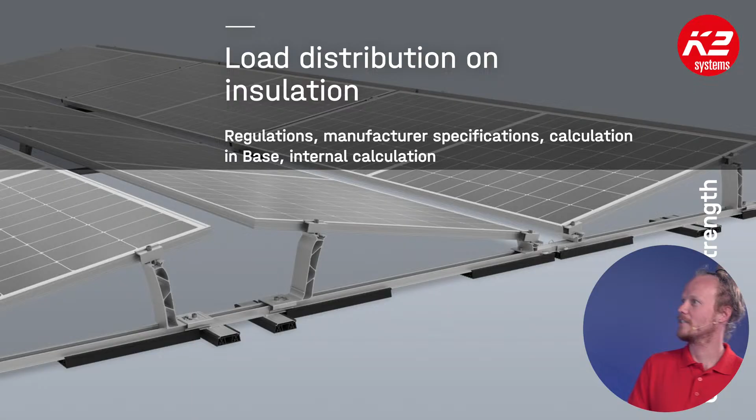In general, the LoadSolver is a product that we have to look at the issue of insulation on insulated roofs, the thickness and the strength of insulation on different roofs. Because when you're going to add something to an insulated roof, you are putting a weight on it that might not be expected to be there as per the insulation manufacturer. And how is that going to interact with the roof? Maybe it's unknown, maybe it is known, maybe it can be predicted. And the shape and size of this extra weight on the roof plays a role.

So the topics of today will be a little bit about some of the regulations which are defining that size and weight and force that you can put on the roof. We'll also go through a little example that we have, taken from some roofing manufacturers that we've been in discussions with. We'll also go through a little base project and talk about the product in a little bit more detail.

We gave a presentation in German earlier this morning, which was very focused on the German market. But while researching for this webinar, we've found that really the regulations are quite different in every country. So it's a little bit difficult for us to give very precise region-specific information. So our first key point, and this is a very important one for today, is that each different country has slightly different regulations and topics that relate to this specific problem or topic.

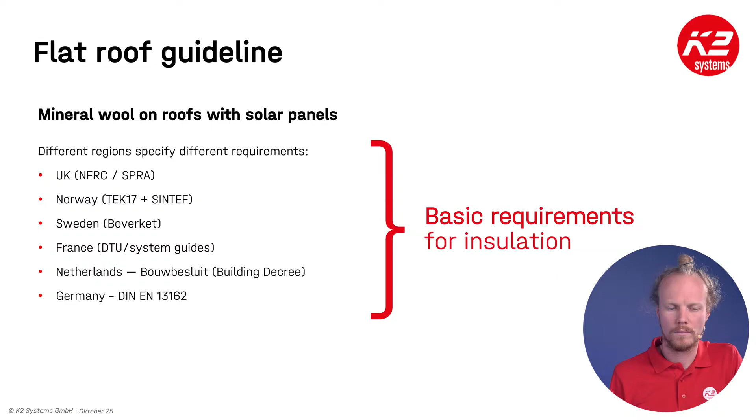In the different countries, you can see them here. These are usually to do with building codes, and specifically for some of them insulated products, whether it be walls or roofs. There are a few examples that we have here in the UK and some of the Nordic countries, and a bit around Europe as well. So we're going to present a specific calculation that's relevant to the German regulations today. It may be relevant to some of the presentation or regulations you have in the country that you're from, but please be aware, revert to these standards when you're looking into this topic for yourself.

As a general overview, almost all roofing insulation companies have a factor that the roofing material has to be tested to and has to meet, generally speaking, to be placed on a roof. This is the CS10, the compression of 10% with 70 kilopascals. This is more so designed as a standard minimum requirement for a roofing building, rather than saying if you put on a very concentrated load of 70 kilopascals, it will only compress 10%. That's not what it's doing. It's more of a general overview saying it's met this requirement, tick, it's then suitable for the roof.

Doesn't necessarily mean it's going to be suitable to put PV on that roof as well. Another one that is often used, and we'll go into a little bit later with one of the manufacturers we've spoken about, is the 2% compression. This is for permanent or semi-permanent loads that are applied to the roof. This is something more suitable for PV, but again, it is dependent a bit on different roofing manufacturers and also different regions. So we'll be focusing a little more on this 2% value, but please refer to the local

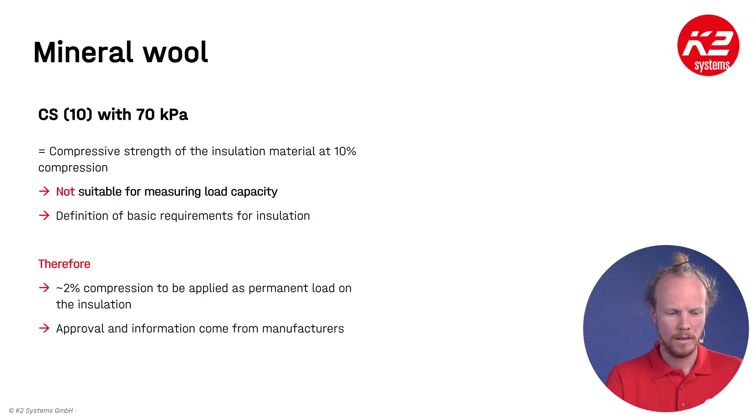standards and the roofing manufacturer. So that's kind of the next point. We did a presentation earlier this morning in German with Knauf, which is a German manufacturer. Well, I believe they're German based, but they have branches all over the place. For example, they have one in the UK and Ireland. And this is the information that they have on their website that we presented, or we didn't present this morning, but you'll see on the next slide we did for the German one.

This is what they're specifying in Ireland. So for the different sized feet that you might have on a roof, or a pressure point that you might have on the roof, they have different allowable stresses or pressures. For a 200 by 200 millimeter square foot, you can have up to 12 kPa. But it does also say halfway through this paragraph that these are references only, and to be in contact with their technical service team. They are the ones, Knauf in this specific case, who can give you an exact

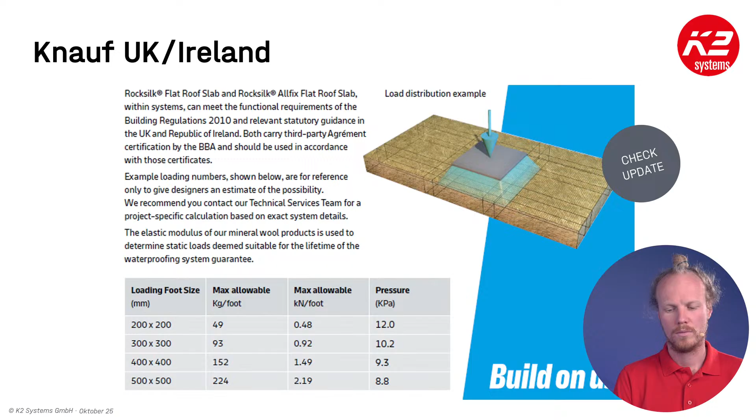value when you say, I would like to place this on the roof, it has a size of this, and then they can provide you with this maximum kilopascal force. Knauf in different countries, and this is what you also might see, in Germany, for example, have a bit of a different system, and it's a little bit more in depth, I would say, where they've actually gone through already and calculated for a number of different sizes. You see here the meter by meter, half a meter by half a meter, all the way down, that for all of their different products, they have different pressure values.

So these values here, I'm just highlighting these because we'll talk about it in a moment, kilopascals. For what we're talking about today, our products have roughly a surface area of 0.03 square meters, which is roughly this size. So we can use a maximum of 35 kilopascals. We've already been in conversation with Knauf about this.

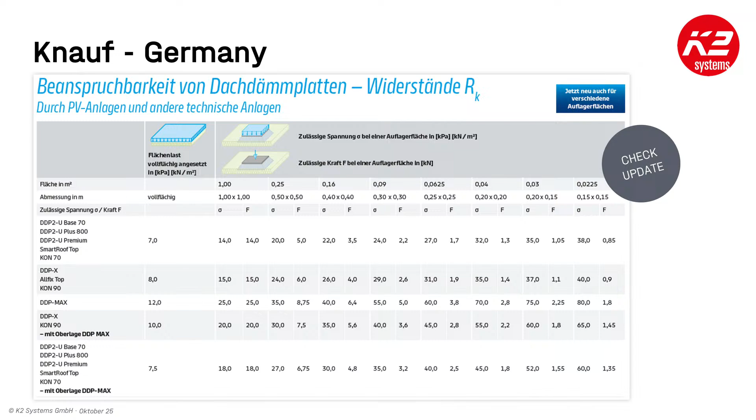The different manufacturers you see here have different regulations for not only their roofing types, also the surface area of the pressure point, but they also have different calculations or different references in different countries. So the roofing manufacturers are also aware of this, that the different regulations are there, and so they handle it a little bit different as well. Any future projects that you might have will probably be a three-way conversation between the roofing manufacturer, yourselves, and us, hopefully to find the best solution that we can.

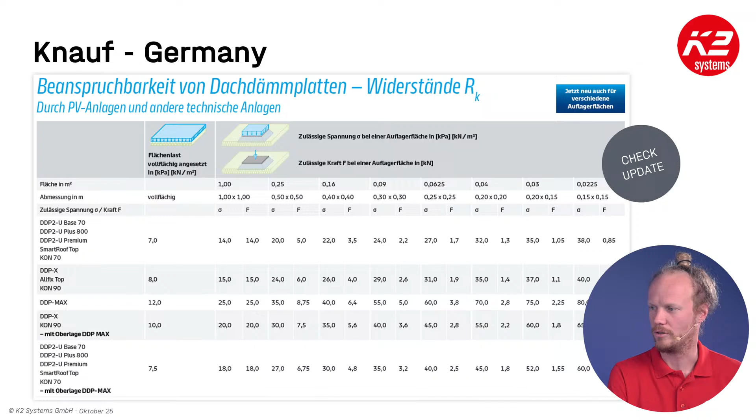But again, in different regions and different areas, you might have different requirements and different points of reference to the maximum pressure that you are allowed to have on the roof. This is effectively what the load solver is here to work with, which is how do we achieve these values here with the products that we have in our system.

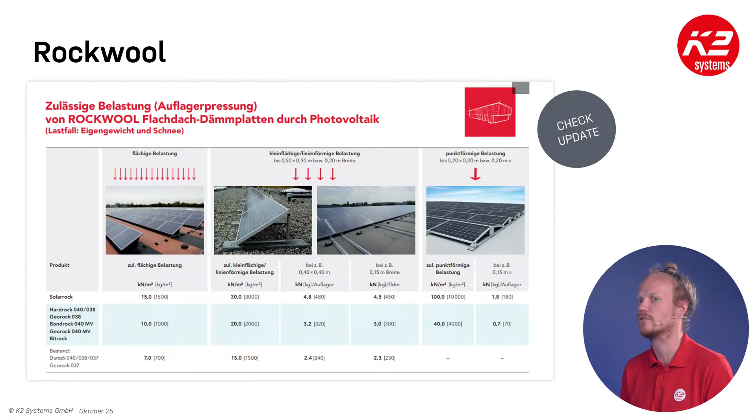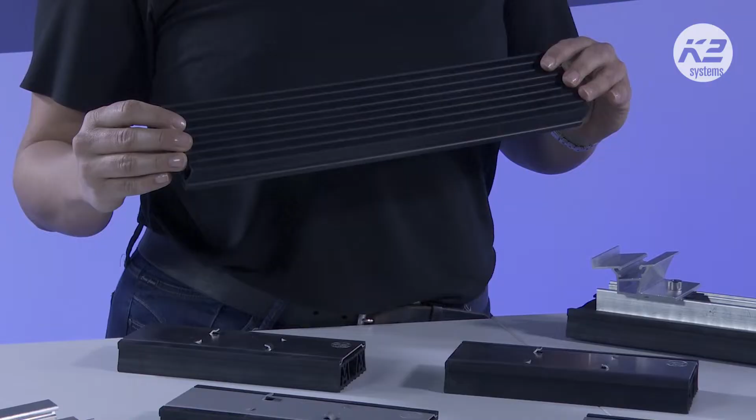Hello again. Maybe we start by showing you what we currently have in our portfolio. Most of you probably know our Mat S. You can see it here installed below our rail. Mat S has a size of 380 by 75 millimeters, so if we multiply this, it's around 0.03 square meters. Not exactly, but quite close.

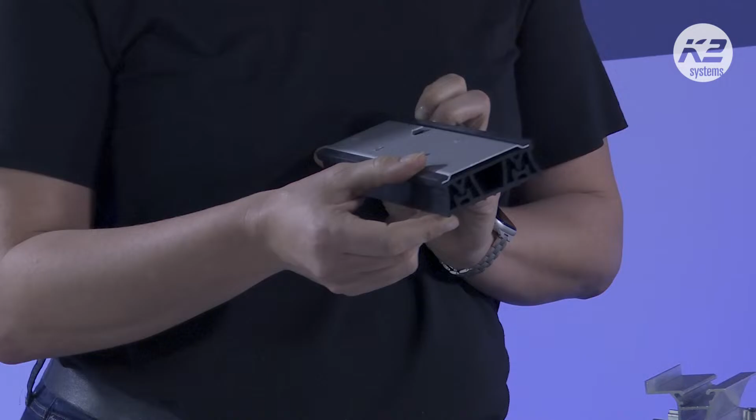And here again we have our Load Solver. This is basically also our Mat S, as you know from the profile, but it's smaller - only 200 millimeters in length, while the width stays the same. What's the difference? If you take our Mat S and put it below our rail, it will look like this, laying under the basic rail. Instead, if we go with our Load Solver, the installation will be done like this - we just put it in here, you hear that sound, and then it's installed. So these are the two products we're going into more detail on now.

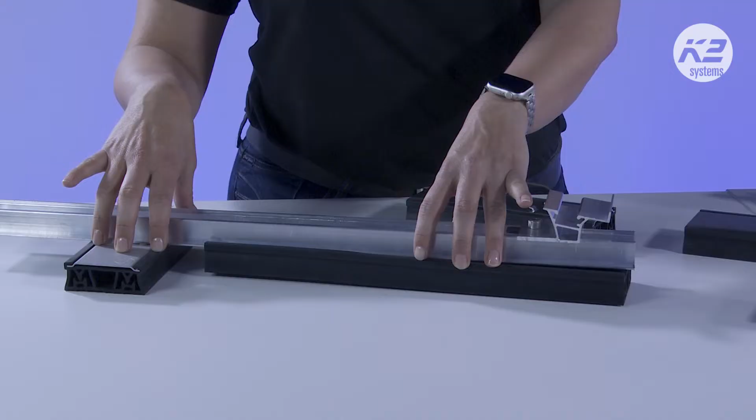It's important for you to know the sizes of these two components, so if you go back into the overview Ciaran just shared, you know what exact number to choose. The second piece of information you need for the right value is what insulation has actually been installed on the roof. This has a certain value, and you have to compare it with the roof surface of the Mat S and the Load Solver, or a combination of both. So let me go over there, I have a slide I want to share with you.

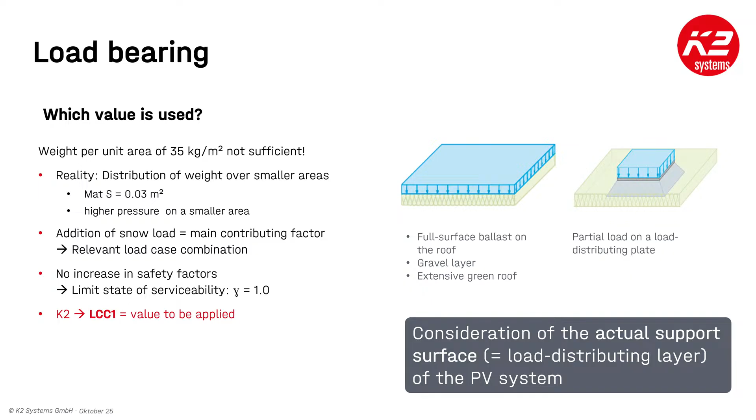So these 35 kilopascal is the value we need to take into account when we jump into our base and check if these two values are a good combination, or if there's maybe an overload, as you can see in this example we've prepared.

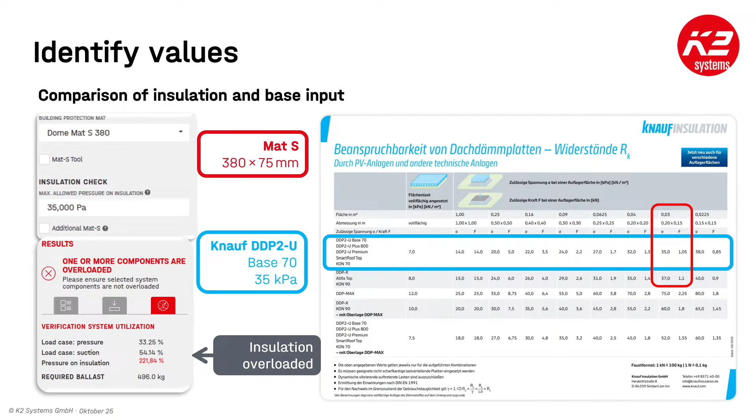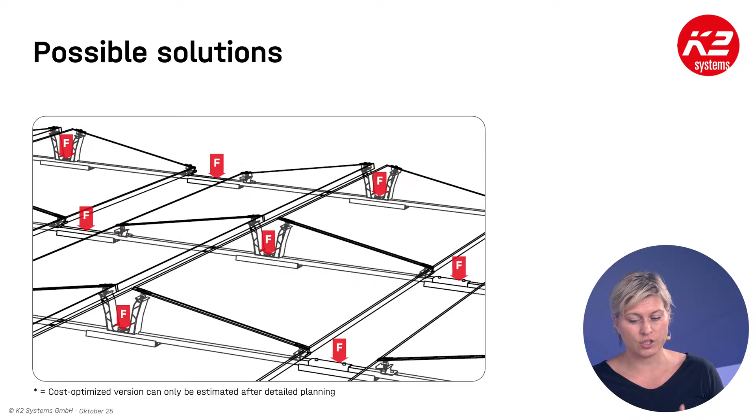Okay, assuming there is an overload, first there are some pretty easy possible solutions to consider. The first is to double-check the layout - do you have certain panels standing alone or very close to the roof edge, or can the gaps be adjusted? Just check this first. Also, is 25 years of wind maybe enough for the calculation? Have you checked the friction coefficient, and have you measured this on the roof?

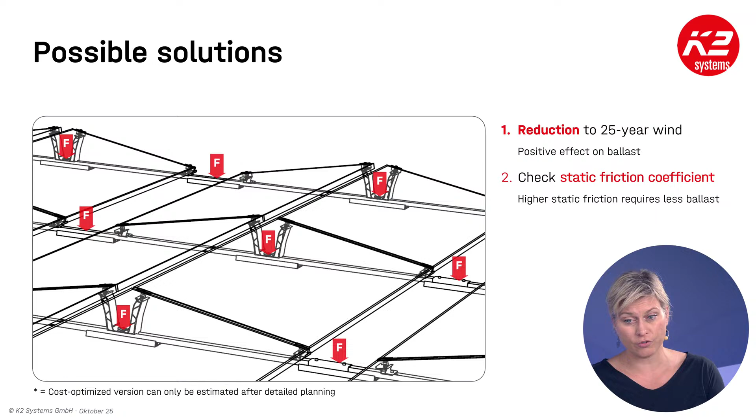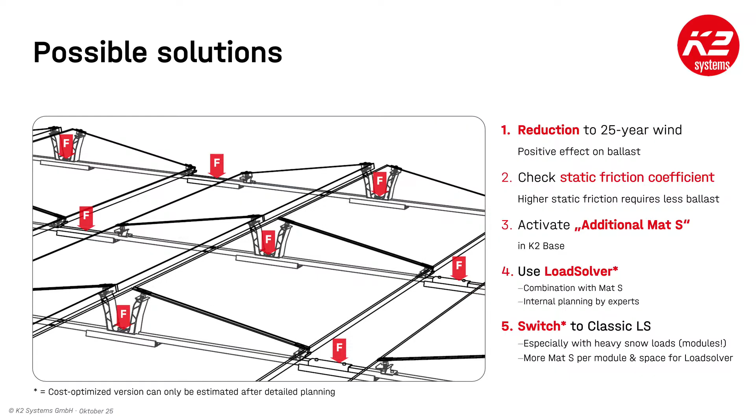The first option we want to show you now in our base is to use additional Mat S - increasing the number of Mat S below the basic rail that distribute the load onto the roof. Second option, use our Load Solver, which I just presented - you can double check if it's a possible solution. Another option is to switch to our classic LS system, because you simply have more rails below the panel, so the load distribution will be bigger anyway.

But let's start with the additional Mat S - you can see it here. In general, when we start with the installation, you only have one Mat S laying below two standing seams, for example. If you click on additional Mat S, we increase the number of Mat S below the system. Depending on whether you go with a classic or express system, this varies a little. For the Dome 6 Classic, it's nearly twice as many Mat S as before, which means a reduction of the weight per load point.

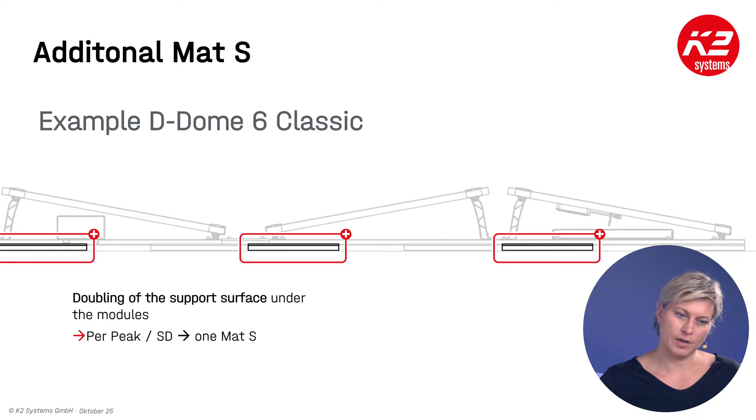This is how it works. You need to evaluate and find out what a certain value is. It's 35 kilopascal, as mentioned before. Then you put this value into the base and click on additional Mat S. As you can see here, we are now at 118% of pressure on the installation. It's still too much, that's why we're going to show you other options afterwards, but it is already much better than the value we had before.

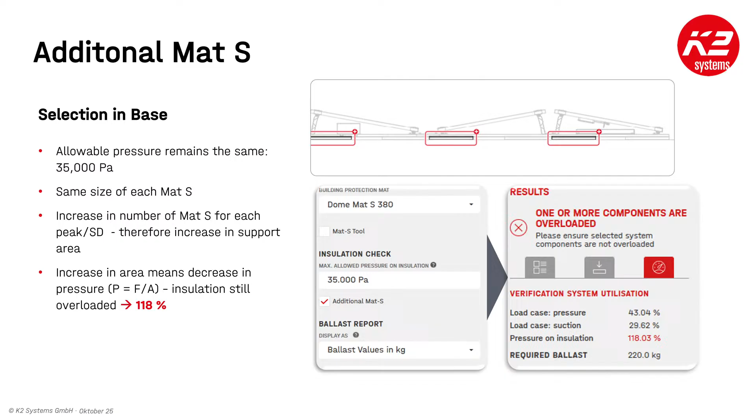Okay, just for you to know what values you have to check: if you take a look into the base project report, you can see the value for the peaks and for the SDs, and then you just compare it with the values from Knauf in our example, and see if it's already sufficient.

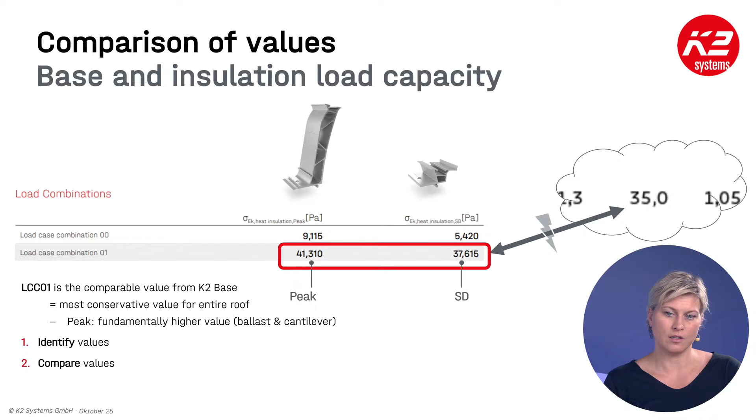So we have just seen it's not enough yet.

Yeah, do you jump into this? No, I'll do it over this one. Okay, yeah, so just maybe to go through that, if you just jump out. Yeah, and then we can jump. You go do it in base. Into base, okay, then let's go for it.

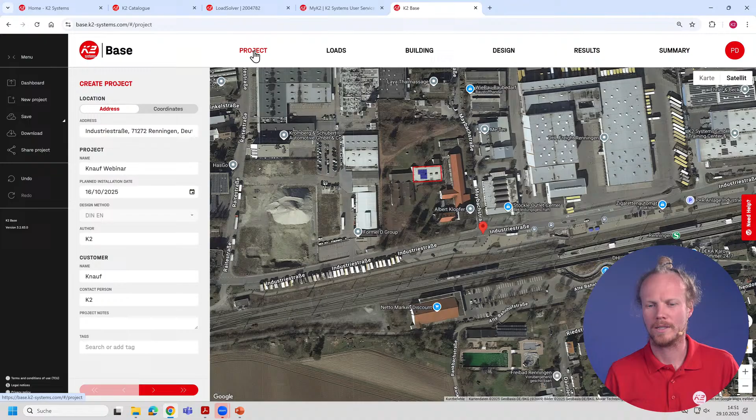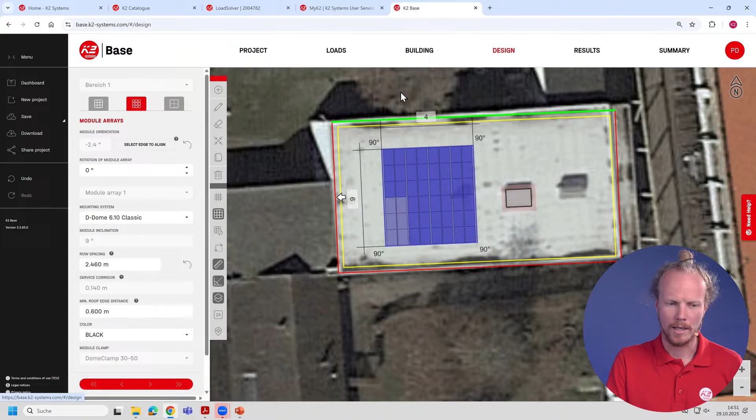And on the results page, right at the end, you see this green tick showing everything is in order. This means that all of our products meet the wind and snow expected loads in this location, as per the tests we've done with our products. You can click on here and you see that these are met by certain percentage factors here.

So in terms of the uplift and the snow, we have 43% and 29%, and we need so much ballast. We can also now add into this calculation a next factor, which is relatively new in base as well, where we can say, don't just test our products, but also test the maximum factor of the insulation. So in this case, we had put in 35,000 pascals.

And you see now it comes up showing something is overloaded. So the calculation, or the input values we've all had done here, have not changed at all. The situation remains exactly the same. We're now just calculating with one more criteria that we'd like to meet.

And if you click on the end, you now see there's this extra factor here as well, the pressure on insulation. And this is now 221% of the 35,000 pascals that we have in here, right? And so this is too much. This is the 221% that we had before.

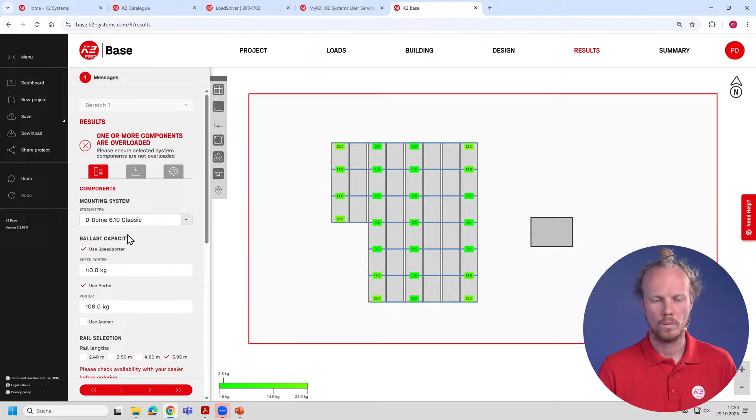So what you will sometimes see here, it just takes a little while to pop up, is sometimes there's a little question mark that you can click on, which gives you a little bit more information.

In this case, we cannot achieve this 35,000 pascals. It's a good idea to click on this little button now, and you get the option of taking it a little bit further. This is where the LoadSolver comes into it. This is a calculation that we will be doing internally for the time being. It may be integrated into Base in the future, but right now we're going to look to do it as a case-by-case process.

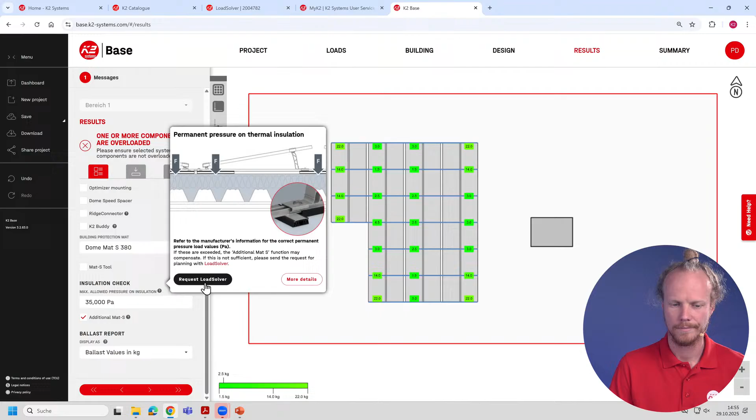You can request a bit more details by clicking on this button here, and it will take you to a bit of a checklist or request form where you can fill out all of the information that you have. Effectively, we just need your K2O file, and from there we can calculate in a little bit more detail. The more information you give us, the better, because otherwise we're going to have to go back and forth a little bit. But the most important one is this K2O file.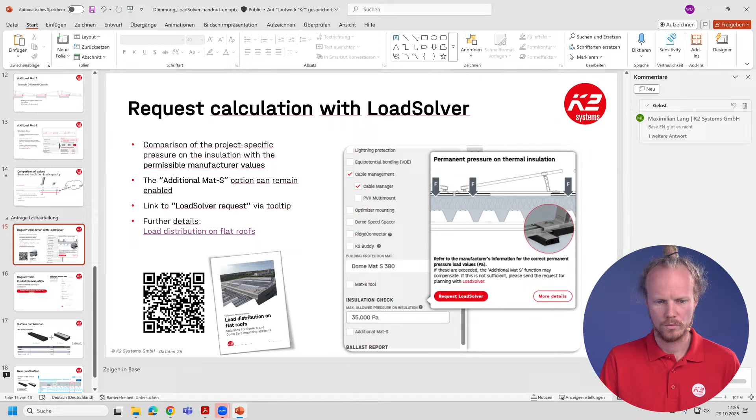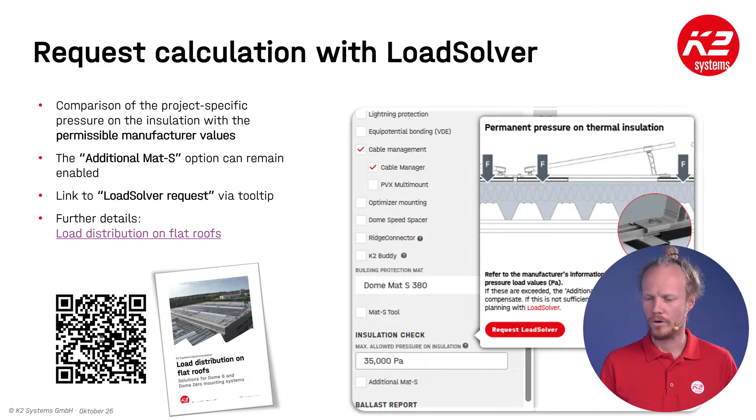So to get to this slide or page, you can go through base. You can copy this part here, but you can also quickly scan this QR code if you're up for it. It will go into a process that our internal sales team, the team I'm part of, and we've got a team across all different areas of Europe who can calculate this for you, will go into it and calculate a little bit more detail. So this is the page that we have here.

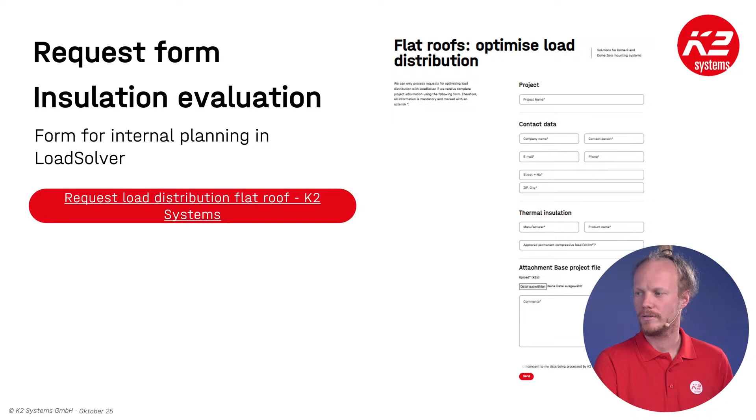And the LoadSolver is - I don't know, Juliana, did you go so much into the LoadSolver? Would you like to go into a little bit more? I think I've explained that before, but if you want, we can just jump back. I think we can continue with the presentation then.

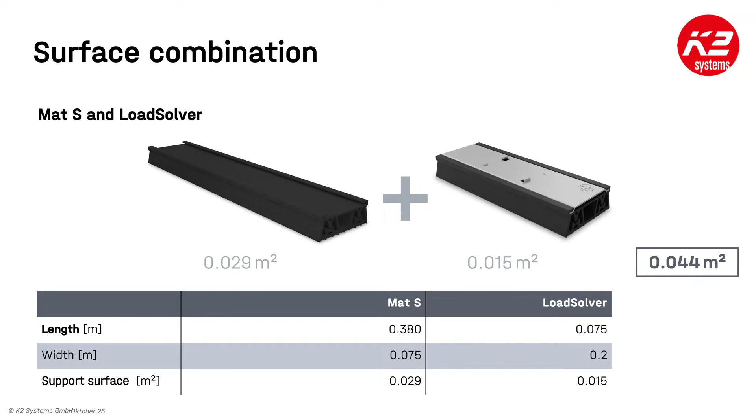Okay, let's go. One idea that we discussed before was adding an extra Mat S. This will sometimes be suitable, however sometimes it may not be. It may also be a more cost-effective solution not to add a full Mat S, but just a shorter one, if you don't need so much space. So instead of having 2 lots of the 0.03 square meter Mat S, you could have maybe only 1 lot of the 0.03 square meter Mat S and 1 lot of the LoadSolver, and achieve a surface area that is a little bit larger, but not so large that it's unnecessary.

You might also find in some cases, if you have quite narrow modules, you actually can't get all of the Mat S in as well. This is a bit of a rare occurrence, but because the Mat S always just line up, you run out of space effectively. So instead of laying the Mat S in the direction of the rail, you can actually put this LoadSolver perpendicular to the rail and utilize the space a little bit better.

What's also sometimes the advantage of this is that in a base project, you will have different ballast values in different regions. So when you click the Mat S button, it's just going to put Mat S everywhere. You might not need them everywhere - you might only need them in certain locations. As part of the LoadSolver calculation we're doing, we will optimize the location of these LoadSolver products to meet the requirements of the roof as per the ballast plan. So it is a bit more of a specialized or precise calculation that we will do with a product such as this.

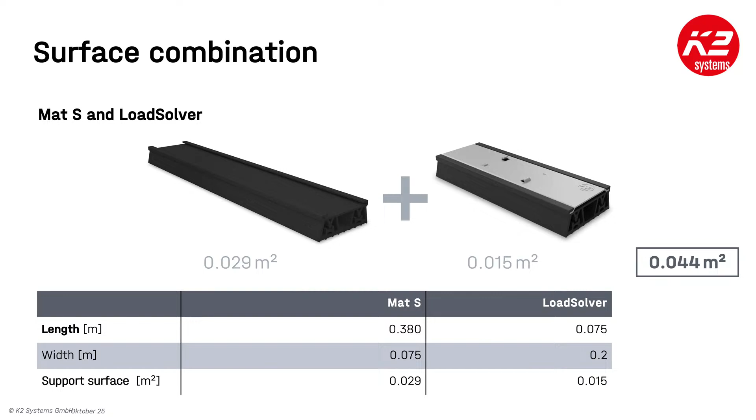The other point we have is it can actually be calculated a little bit differently as well, where when we are adding a Mat S, we're actually going to be increasing the area that the force is being applied to a little bit. So we're going to jump from the 0.03 square meter foot to now a 0.04 square meter foot, roughly. This now actually changes the pressure on the roof that needs to be calculated as well. But this is something we'll be looking at internally as well.

So it's just something for you to be aware of, to keep in the back of your mind, that as you increase the area, the maximum pressure will reduce, because if it was to stay the same, you're just going to end up with a huge kilogram load on that roof. Pressure is inversely proportional to the area, so the pressure must be reduced to ensure that the dead weight or kilogram load, whether due to snow, ballast, or panels, doesn't exceed and get too high.

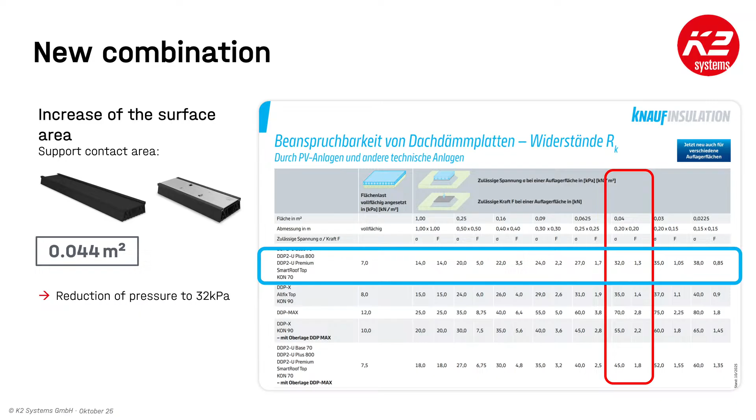We will, I don't know if we can jump over, or maybe you can stand there, Juliane. I'll look to see if we have any questions that have been submitted. I think Vlad, there's no question yet. Already, maybe just some additional information.

If you pass over that project to us, we will do the calculation internally. What's important for you to know is that at the end you will receive a document saying okay, it's all fine. We will give you the best type of combination, maybe in different areas, different combinations, but you will receive a document saying, under this SD, one Mat S and one load solver will be sufficient, whereas maybe under the peak in the edge area you will need 2 load solvers and 1 Mat S. That's all possible. You will receive an overview from us with the bill of material and the document confirming it's all fine. I think that's important for you to know.

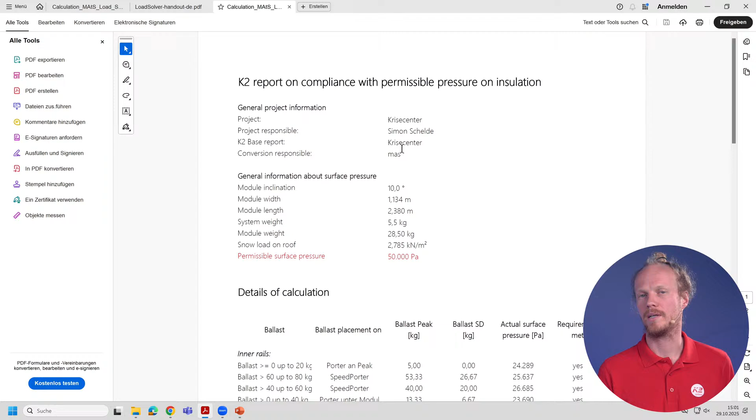Yeah, and we actually just have a little sample of that here, which maybe we could present. So this is effectively an appendix that we would attach onto the base report, or send along with the base report, which highlights the requirements that your project has and the requirements that the roof manufacturer is specifying for that specific roof. In this case, maybe we have the permissible surface pressure of 50 kPa.

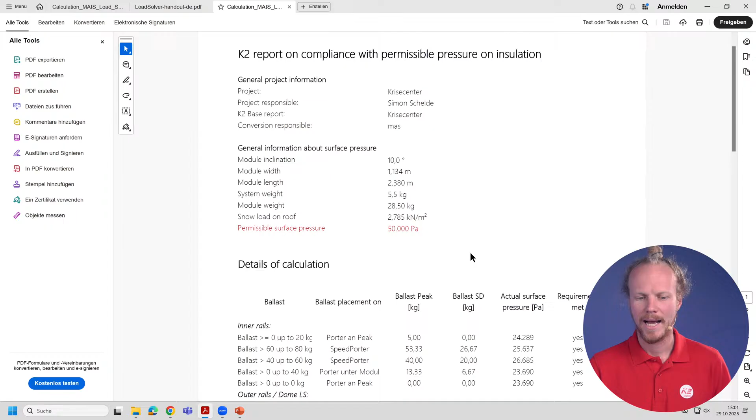Each project, if you're used to base, you'll know it and you'll have seen it before, where you have different ballast values all over the place. If you're not so used to base, maybe I can quickly show you what I mean. Here on the corner we have 22 kilograms, but in the middle we have 3 kilograms. Here we have 2.5 kilograms. You can imagine over a large roof there are going to be lots of different values that need to be placed at these different locations.

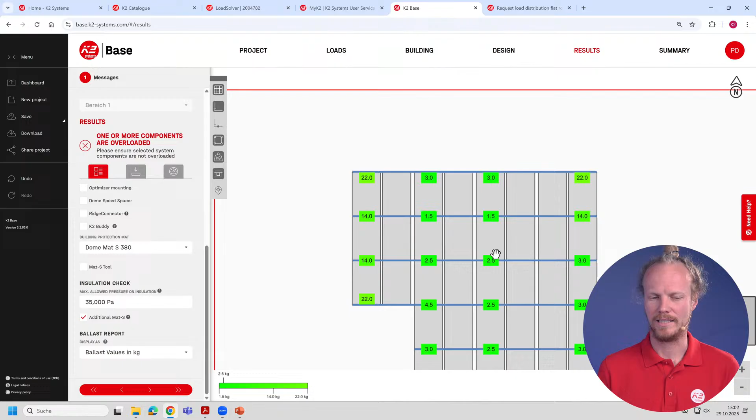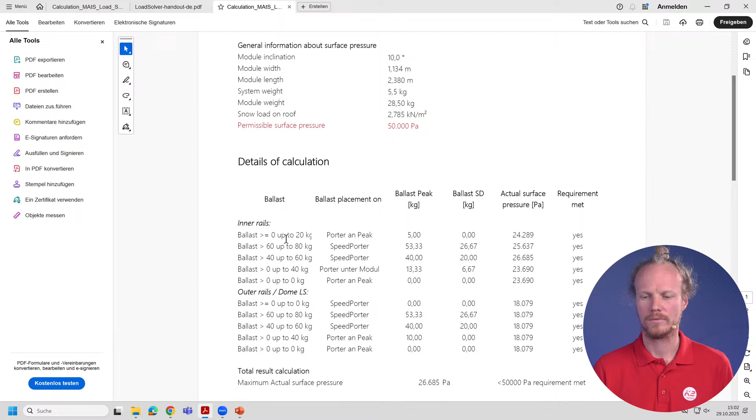So the pressure under this section is going to be a little bit different to the pressure under this section, and we're going to need to increase the surface area here more than we will here. What we're specifying in this section of the document is that between a ballast value of 0 and 20, placed in a certain location, we can either add something or specify the minimum requirement in terms of surface area. Maybe it's a Mat S, maybe it's 2 load solvers, maybe it's a Mat S and a load solver. All of that is specified here.

We will, as I said, optimize it to a point where we could even optimize for a number of criteria. If you were looking for just the most general, easiest installation, we could optimize in terms of that. If you're looking for a cost-effective one, we could also optimize for that. Or if you're looking for one that just reduces the pressure as much as possible, that would also be suitable. So this is again a bit of discussion that needs to be had between yourselves and us, because we can provide solutions to fit different needs as long as we know what those needs are. It's always good to have a conversation about that.

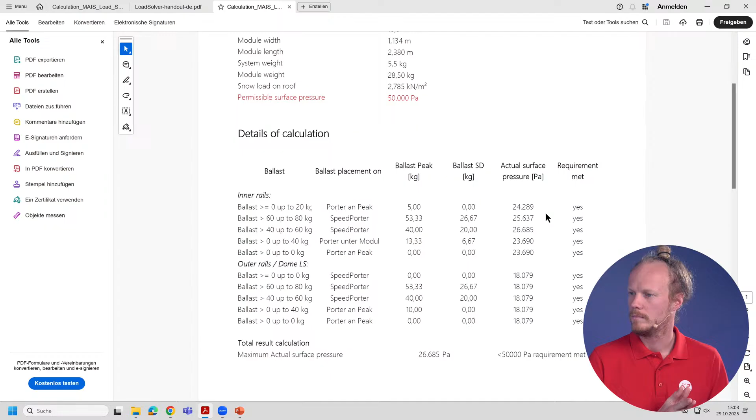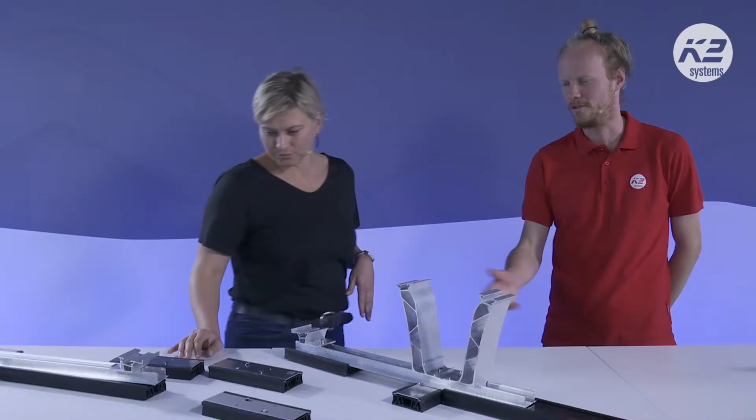I'm not sure, it'd be about the mounting structure. So the aluminium components - and please correct me if I'm wrong - there's no issue there, and I know we have done recent tests on the Mat S. We have done a lot of tests on the Mat S. Yeah, sure, I think there is no issue with that. So you heard it. I mean, it depends on where you are - that's what we need to see. There are certain requirements we know, like BROOF 3, 2, 1, whatever it is, and that depends a lot, so this is what we need to check. For example, we have solutions for the French market where we have passed the BROOF T3 tests, so you can be sure that this is suitable.

For the customers in the UK, we have a team based just outside Reading, and they'll be able to answer any questions you have on the local requirements in terms of fire safety.

The Mat S is a product we've been using on roofs in the UK for 3 to 4 years now. I would be highly surprised if it had not met any of the fire requirements. The new material is effectively just a piece of sheet metal on top, so it falls into a very high fire rating class because it's not really a combustible product.

BROOF T4 - is that a BROOF T4? I think we should maybe talk about this later. I'm not really sure about this.